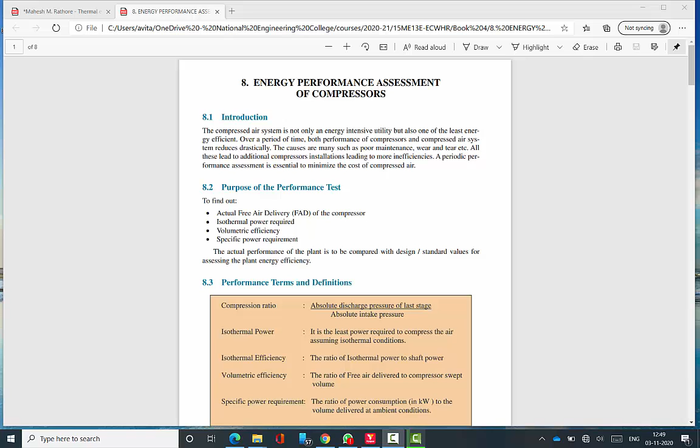Then the specific power requirement, which means how much current is needed to raise a certain pressure. The actual performance of the plant is to be compared with design standard values for assessing the plant energy efficiency. Now we see the performance parameters one by one. Compression ratio is absolute discharge pressure of the last stage divided by absolute intake pressure. Already we discussed in thermal engineering, in the Otto cycle, the compression ratio is equal to V2 by V1.

Sorry, V1 by V2. Then the absolute discharge pressure of last stage after compression divided by before compression. Okay, then isothermal power. It is the least power required to compress the air assuming isothermal condition, constant temperature condition. Then isothermal efficiency is the ratio of isothermal power to shaft power.

Okay, isothermal power: the work formula for the isothermal process is W equal to P1 V1 ln P2 by P1. Okay, it's the formula for the isothermal power. And shaft power is the actual electricity input given to the compressor. Okay, it's the shaft power.

And volumetric efficiency is the ratio of free air delivered to the compressor swept volume. Okay, what is the free air delivered? I already explained. Then compressor swept volume is total volume minus clearance volume. Okay, swept volume is stroke volume. Okay, this is called clearance volume. The difference between total volume and clearance volume.

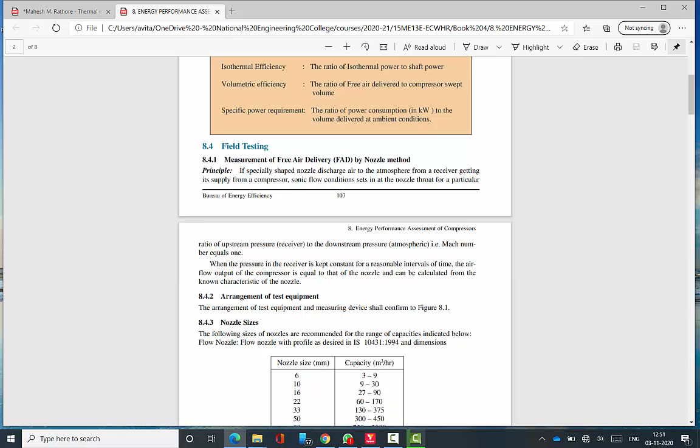Okay, then specific power requirement is the ratio of power consumption to the volume delivered at ambient conditions. Okay, then measurement of free air delivered. Field testing procedure is one by one. I shared the document. If you are interested, you can study the things. I can directly go to the formula section.

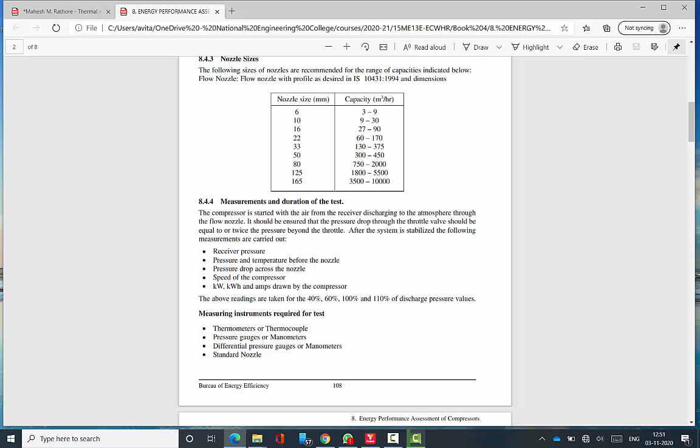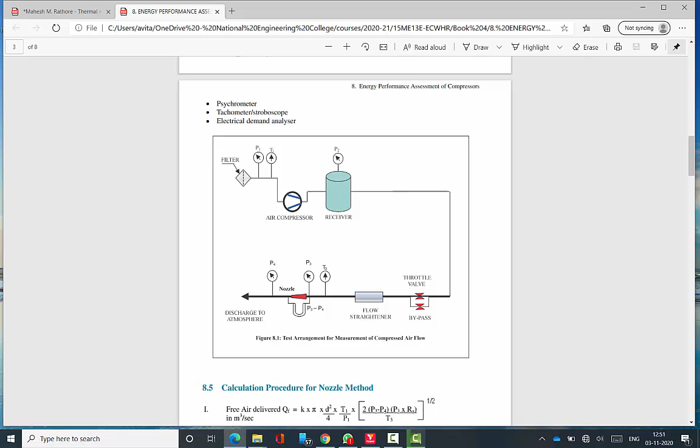For the free air delivered, the formula is large: K flow coefficient, pi d square, and T1, P1 are initial temperatures, and P3, P4, these are the pressure gauges. The gas is sent to the nozzle, then what is the pressure difference? With the help of this pressure difference, you can calculate the velocity. From the velocity, you can calculate the discharge, Q equal to AV. With this concept we can calculate how much free air is delivered for a particular compression.

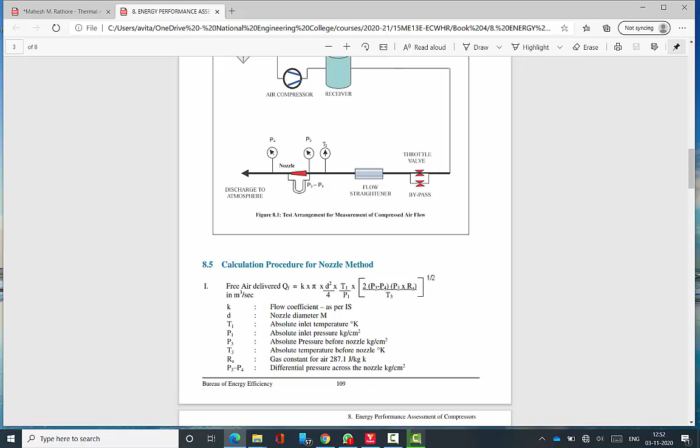Then isothermal efficiency. Isothermal efficiency is the ratio of isothermal power to input power. Then isothermal power is P1 QF1 ln R. P1 is pressure, QF is discharge, and ln R. R is the pressure ratio, P2 by P1. Remember the first law of thermodynamics concept.

Isothermal work is P1 V1 ln P2 by P1, which is equal to ln V1 by V2 also. You can write. Then here P1, and volume is here; I notated volume as Q discharge, and ln R. Log e is called ln, therefore ln R. R is the pressure ratio, P2 by P1, divided by 36.7.

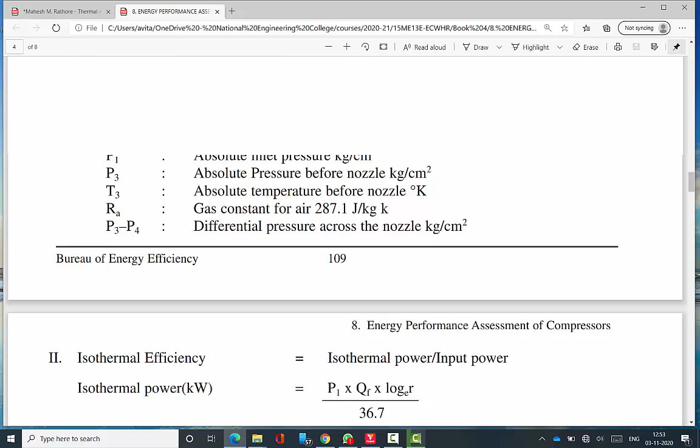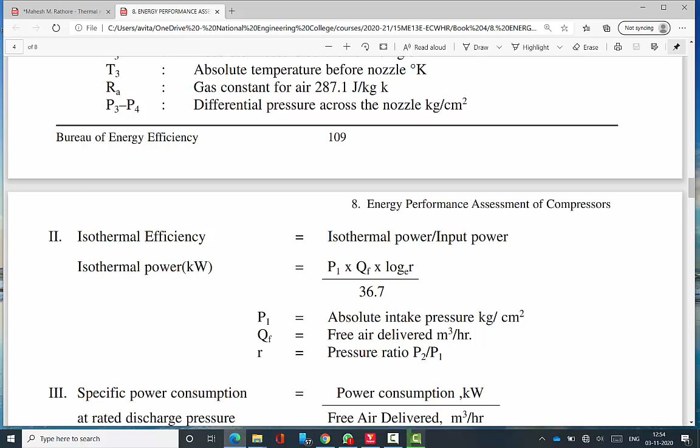Then specific power consumption: power consumption divided by free air delivered. Specific power consumption at rated discharge pressure, at atmospheric conditions, is the power consumption divided by free air delivered. The power consumption is already measured, and free air delivered is also already calculated. Substituting these, you can get specific power consumption.

Okay, then volumetric efficiency is free air divided by swept volume. Compressor swept volume is also called compressor displacement, piston displacement from top dead center to bottom dead center. The swept volume is also compressor displacement or stroke volume. This is pi by 4 d square; d is the bore diameter of the cylinder, and L the stroke length.

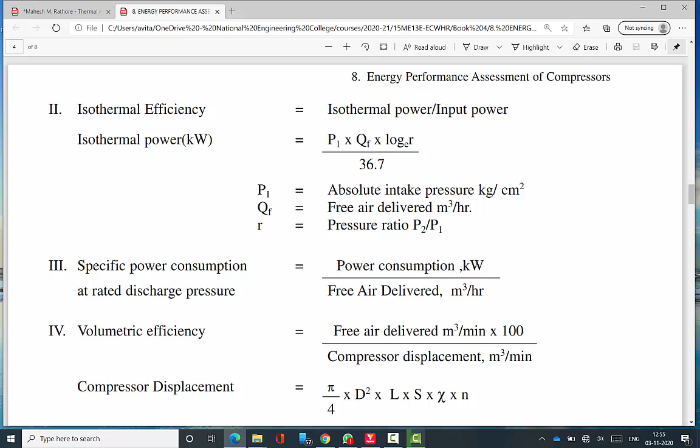Yes, compressor speed, and chi symbol, one for single acting and double acting, and number of cylinders. Similarly for IC engines, you can do the performance calculations. Remember that in lab time also. Then compressor displacement, also called stroke volume, is equal to pi by 4 d square L into n. Notation is different here: S is speed, X is for single acting or double acting, and number of cylinders.

Generally the reciprocating compressor is a V type with 2 cylinders. With the help of this formula we can calculate the compressor displacement, and from that the volumetric efficiency. These are the theoretical concepts to find out the compressor efficiency. With this calculation we can conclude how much energy is utilized in the particular compressor section, and from these values we draw inferences, suggest things to the management, and management takes necessary action to conserve energy.